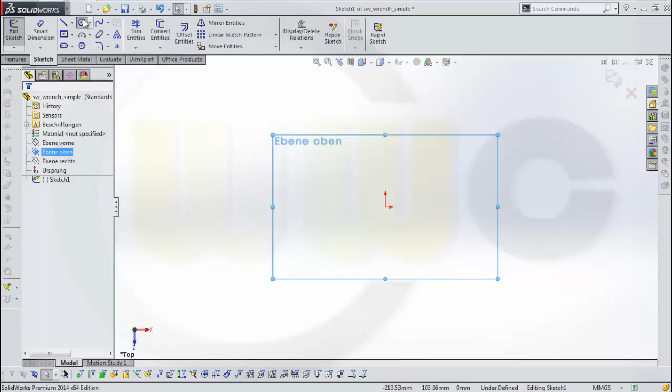Let's start with a sketch on this plane. I need a circle, and the diameter should be 35. I want to trim it. And the dimension, that's okay. And this one should be for construction only.

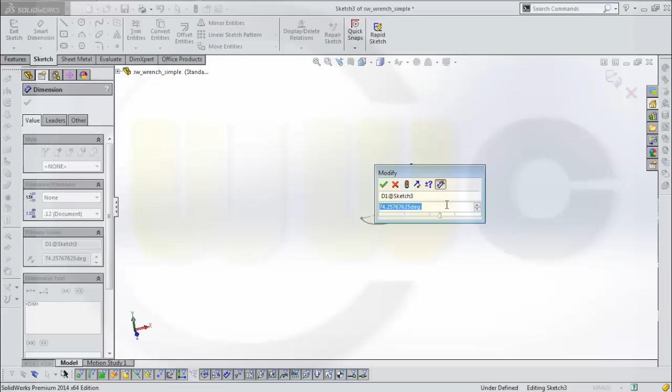Leave the sketch. Then I need another sketch, not on that plane, but on this plane. That's just a line which has an angle of 75 degrees, and the length should be, let's say, 10.

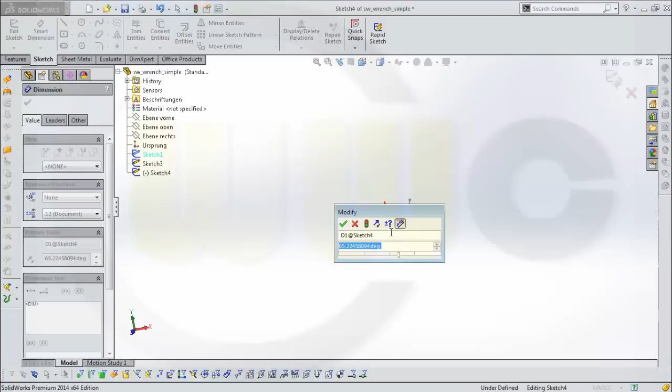Okay, and another one on the same plane, which looks like this. There should be an angle as well, 75 degrees, and the length could be 10 as well.

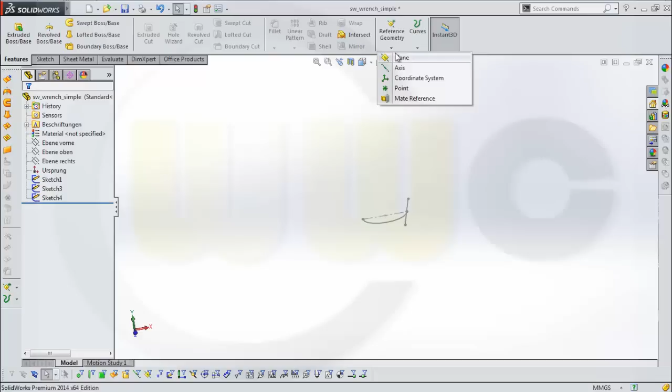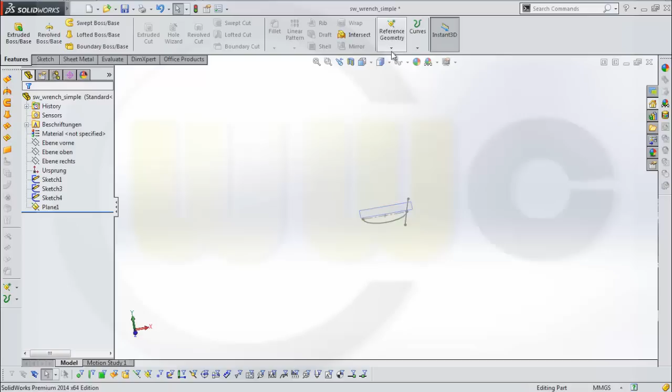Okay, then I need two planes. I need a plane with a distance to this one, yes, 7 millimeters, and another one. Flip and confirm. Okay.

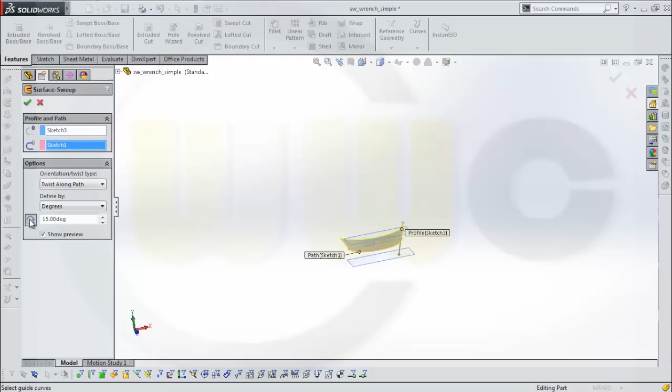Then I will go for a swept surface. The profile should be this one, the path should be this one, and it should twist along the path by, let's check it out, 15 degrees. 30. Confirm.

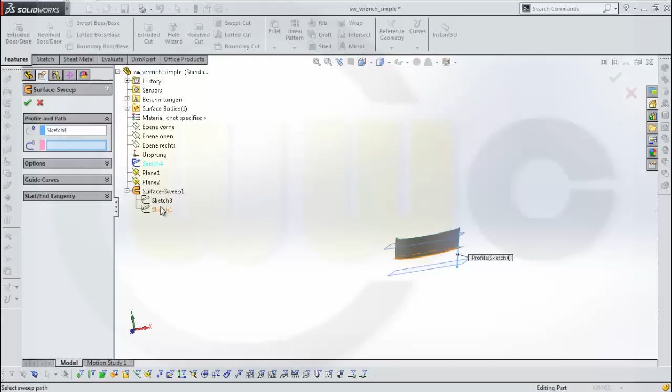And another one with this profile, and not the edge, but sketch one, and confirm it. Yep. Now I could knit these two surfaces.

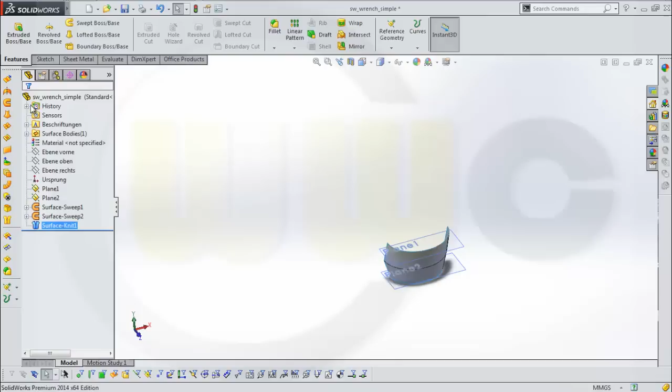Okay, and I could make a mirror with this plane, and I want to mirror the body. That's the body. Knit surfaces, merge the solids, and confirm. Nice.

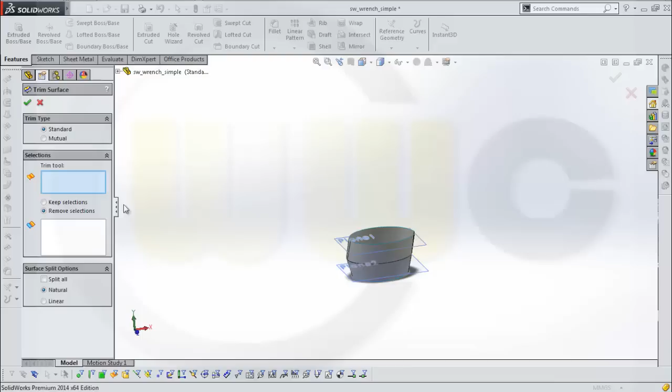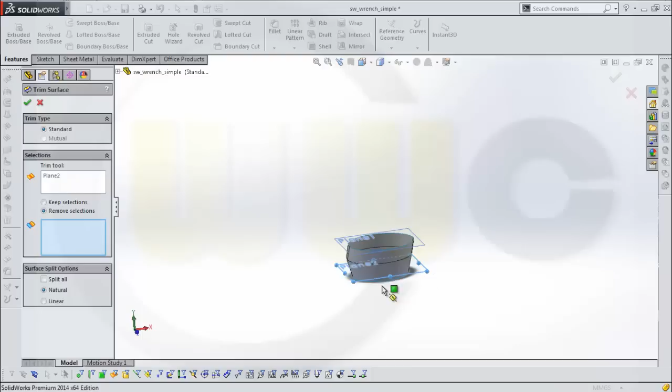Now I could trim this one. Therefore I will go to trim surface. Trim tool should be this one, and I want to remove the upper part, and confirm. And another trim. That's the tool, and I want to remove the lower part, and confirm. Nice.

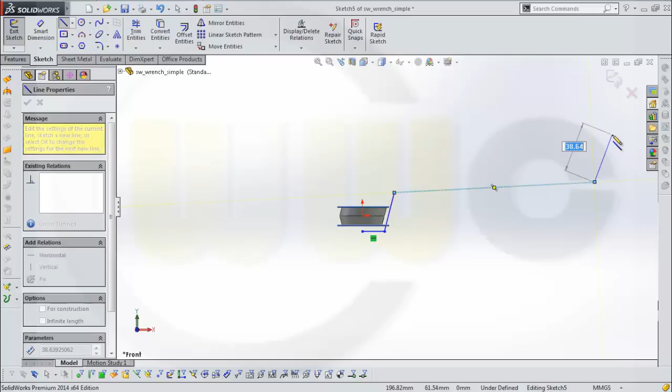Okay, I need another sketch on that plane. And this might look something like this. Yep. And some dimensions. This should be 35 divided by 2. Nope, that's wrong.

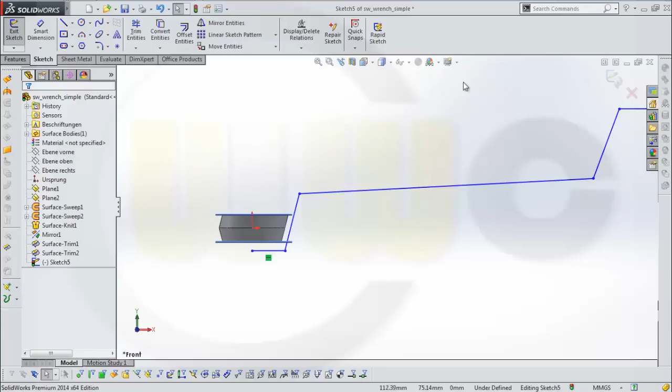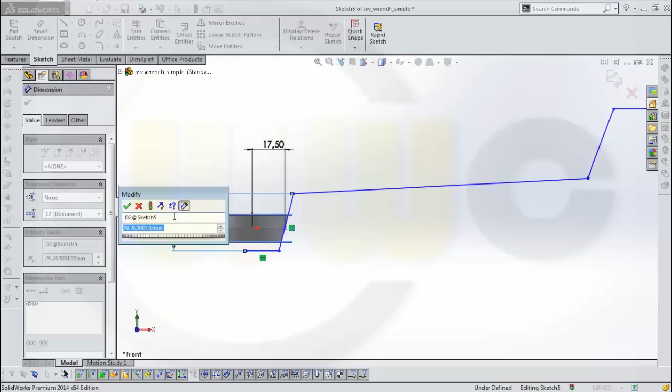There should be a point on that line, and this point should have a distance from center, 35 divided by 2. This distance should be 33.5. This should be 33.5. And the distance from here to this point should be 325 minus 7.5 minus 20.

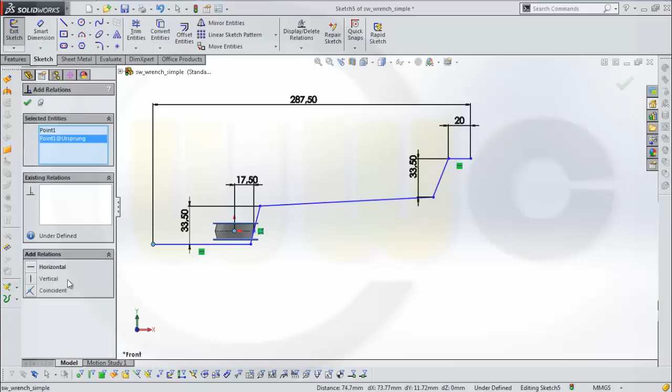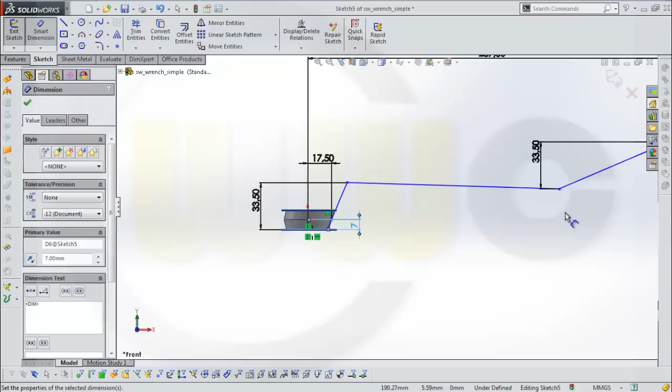Okay, this might be 20. And I need some relations. That point and that point should be aligned vertical. Yeah. And the distance should be 7. Move it up a little bit.

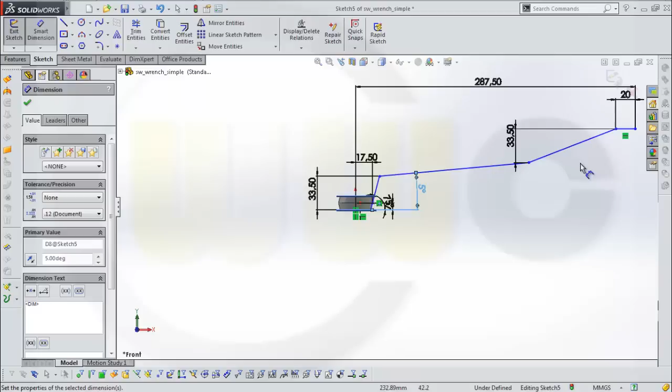Then there should be an angle of 75 degrees. This one should be 5 degrees. That one should be 75 as well. And this point should be aligned horizontal. Yeah.

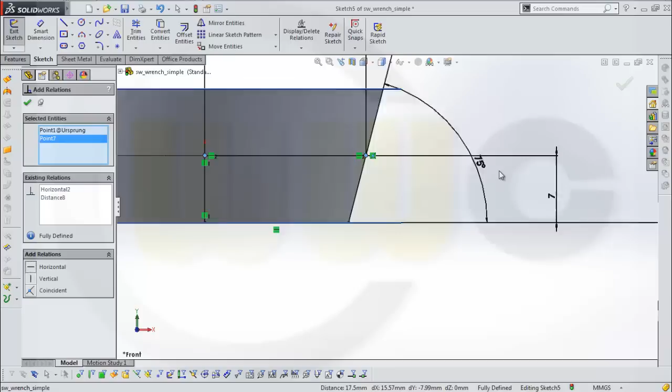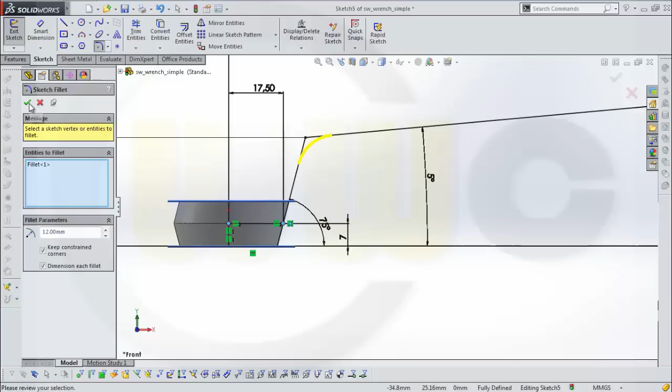Okay, and I need some fillets. This one should be 12 or 12.5. This one should be 1, and this might be, nope, 18, and the last one might be 5.

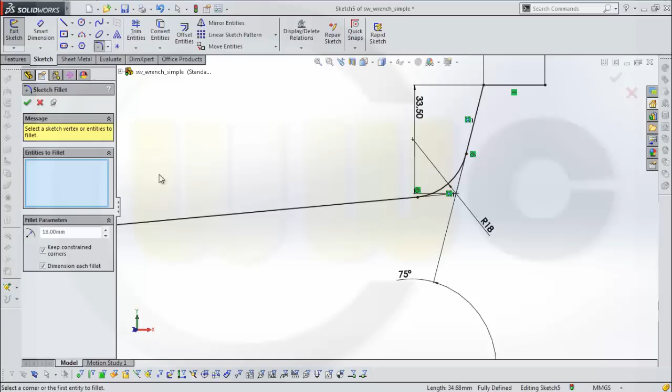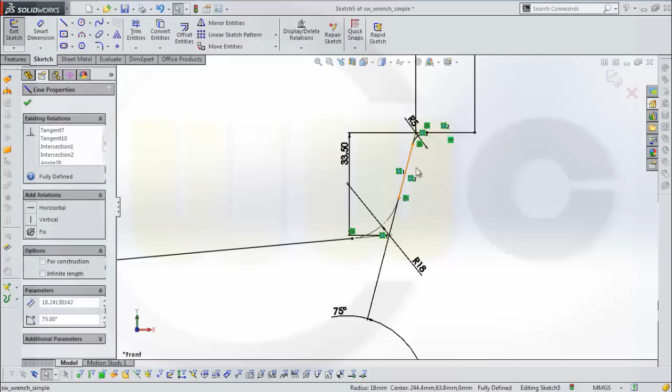And now I want, for the moment, just the line, and the other elements should be on construction, which means this one is on construction, that one, that one, that one, this one, this one, that one, and that one as well. Leave the sketch.

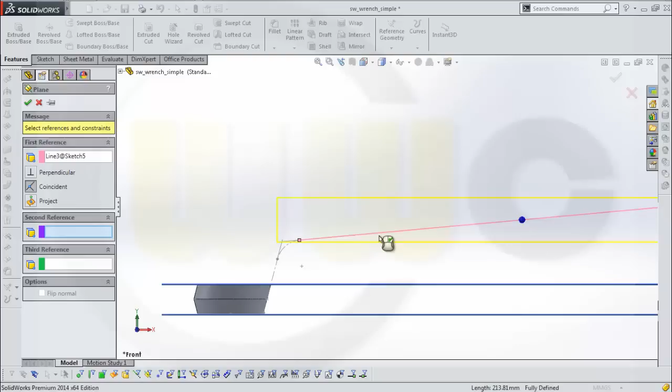Then I might need another plane, so go for plane, and one reference should be this, and the second that point. So I got a plane which is perpendicular to that curve, and finish it.

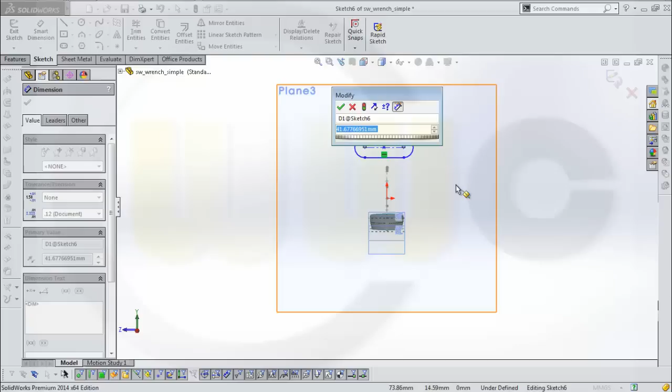Okay, then I need a sketch on that plane, so go to this plane, sketch, take a normal view, and this might be an elongated hole. Give it dimensions. This should be 8, and this should be 4.5.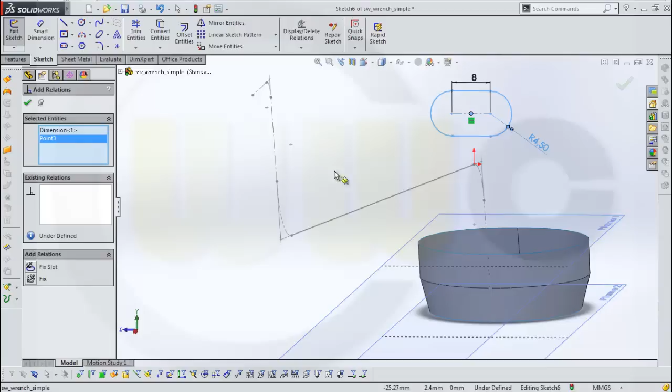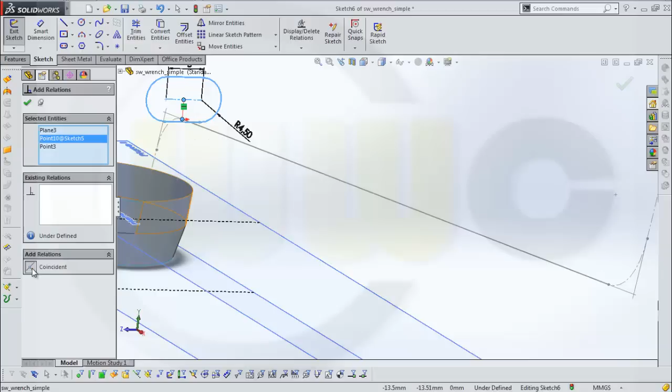And add a relation. This point should be right on that point, coincident. So I missed the correct one. I need, of course, this point. Add a relation between that point and make it coincident. Okay, now leave the sketch, and now I can make an extrude with that sketch up to an element, up to a vertex, up to this vertex, and confirm it. Yeah.

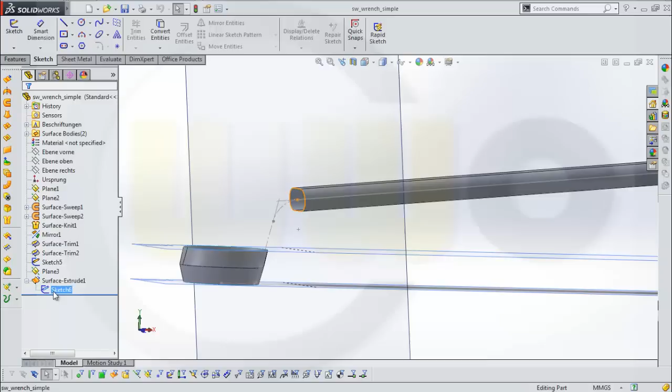Okay, I just noticed a small error. This should be in a different position, so I go for my surface extrude, and I will change the sketch because this is wrong. There should be a distance, and this should be 4.5.

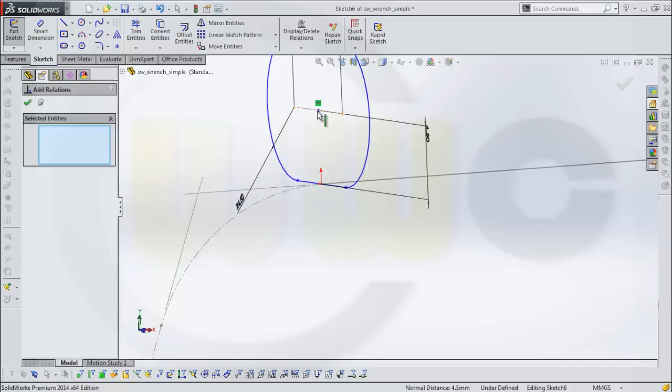And I need a relation, this point and that point, no, this, come on, this point and that point should be vertically aligned. Yeah. Then I need some more curves.

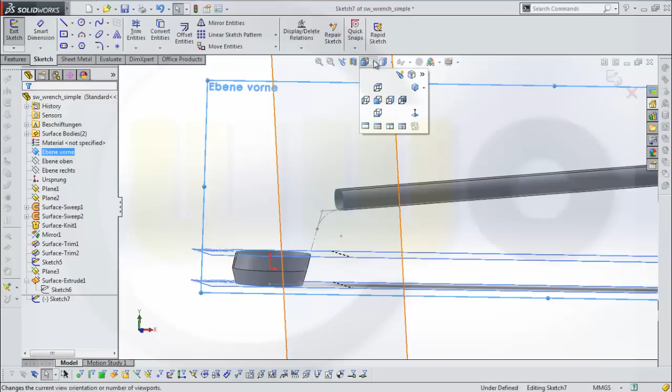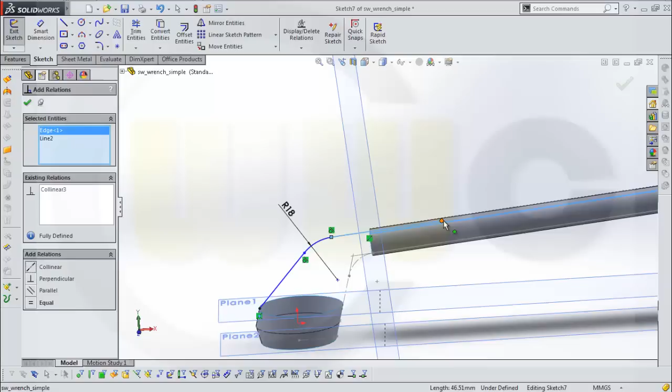First, one sketch here. Take a normal view. This should look like this. Give it a fillet with 18 millimeters. And add a relation. This point should be right on that point, coincident. This line should be in the surface, collinear. That point should be in that plane, coincident. And I need a dimension between this line and probably that plane, 75. Confirm and go.

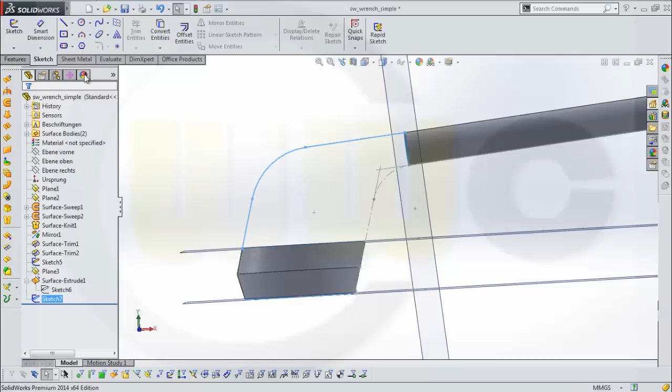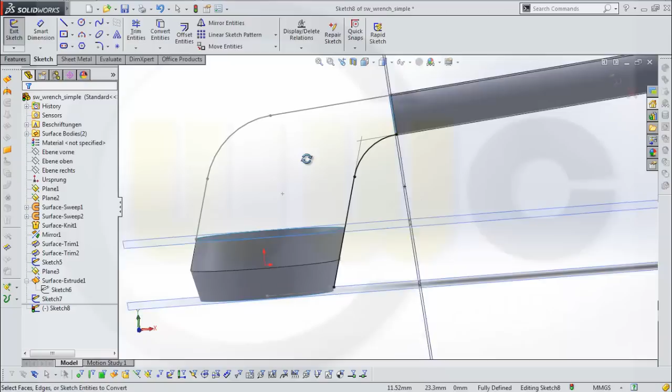Now I need a small part of that curve, so I could do with another sketch. That's this plane again, and I want to convert this and that. Yep, but I want to trim it, so I need a point. This point should be coincident in that plane, and then I should probably trim it and draw a line here.

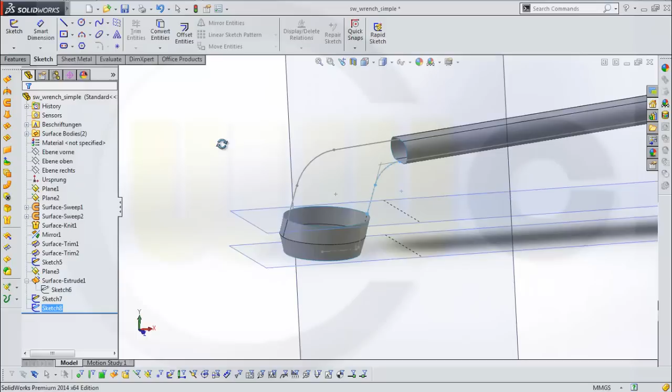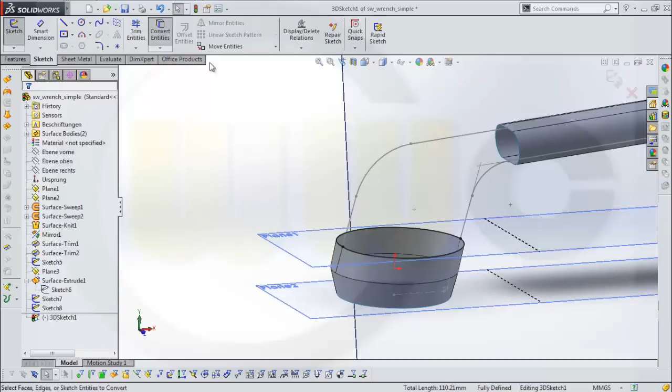And maybe add a relation that should be tangent. Yeah. Okay. Now I could try to do a loft. I want to have a loft. No, I forgot something. I need a 3D sketch. And I want to convert this and that. And I want to convert these edges as well.

And okay, now I could try to do a loft. I want to have this and that profile. I want to have tangency to the first face and tangency to the second face.

Maybe move it a little bit. Nope.

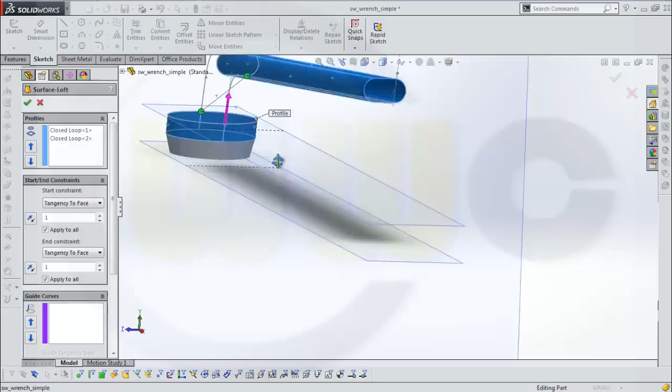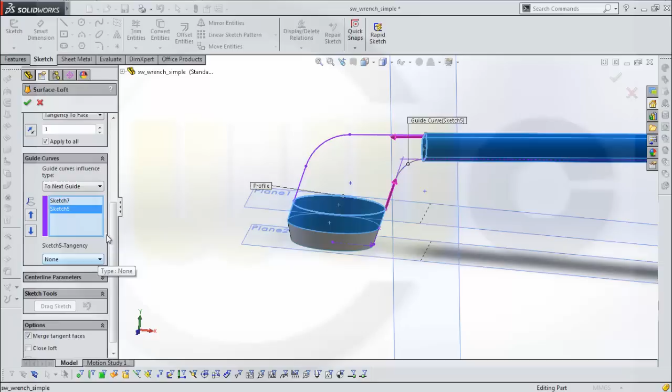Okay, and I want to have some guide curves. That's one guide curve, and I want to have a second guide curve, this one. And that's not sketch 5, but sketch 7. Looks nice, very, very nice.

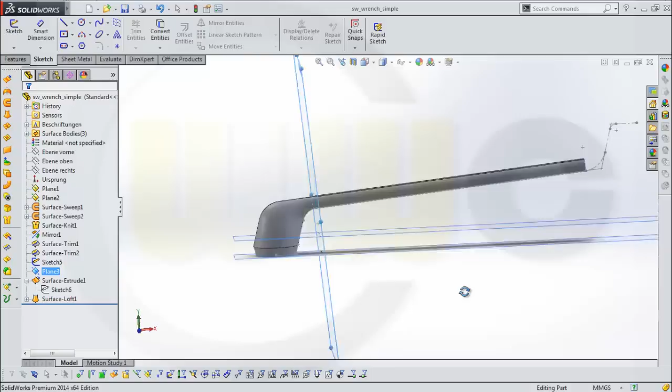So I need 2 more sketches at least. Let's take a look again on this plane. And this might look, it could be something like this. Goes up.

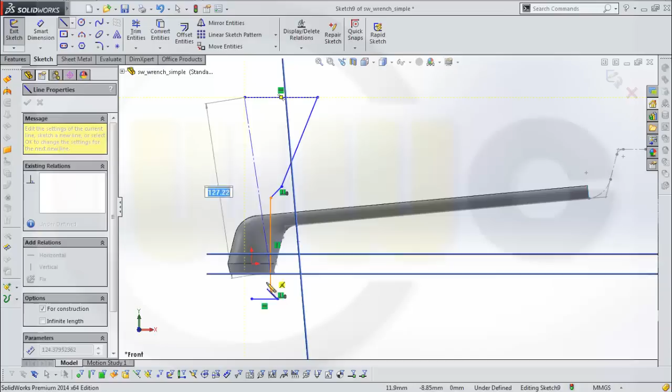This could be a center line, of course, so let's make it a center line. And then add some dimensions. This should be 30 degrees.

This should be 30 degrees. This should be 80 degrees. This point and that point should be vertical aligned. Yep.

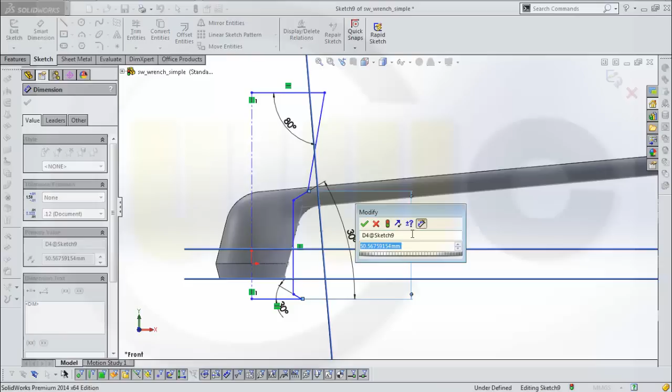Then some more dimensions. This should be... first I want to add some more relations. Vertical aligned, and then I could change this one to 14.

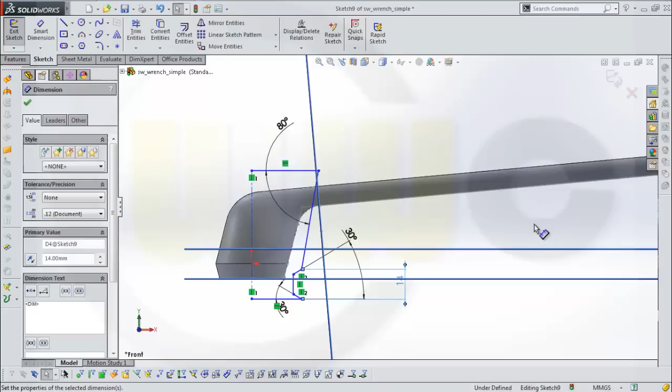And this should be 18.76 divided by 2, and this should be 5.3 divided by 2. Yeah.

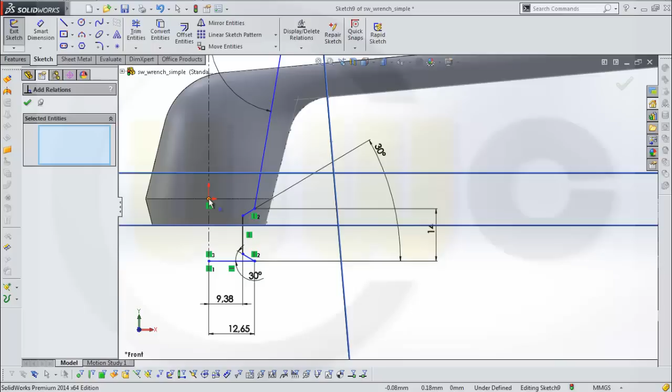And some more relations. This point and that point should be vertical aligned, and this point and that point should be... there should be distance from this point to that line, and this should be 7.

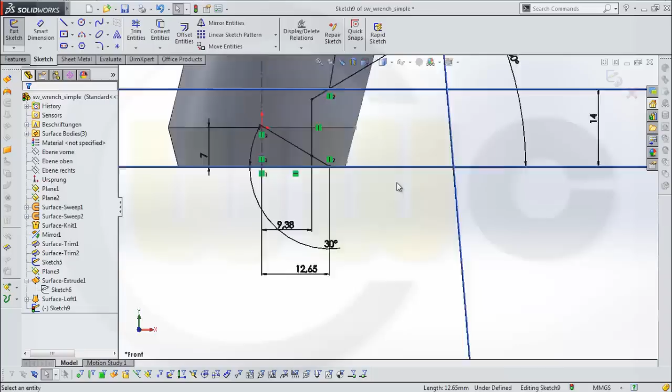Okay, this might be for construction, and this might be for construction. And close. This should be a revolved surface. This should be the complete sketch.

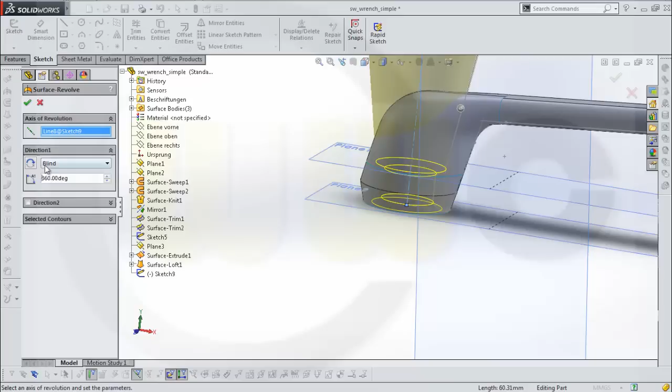And that's the axis. It should be 360 degrees. Yeah.

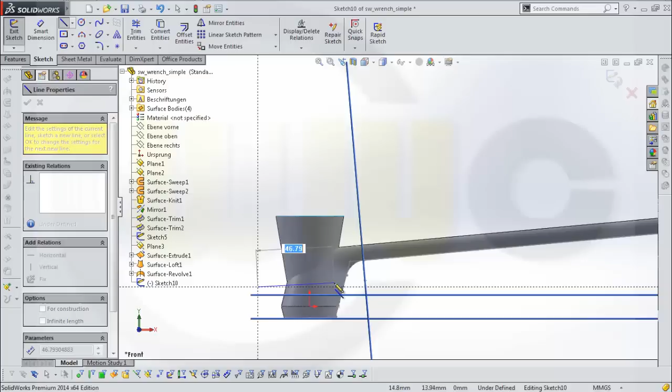Okay, another sketch. Take a normal view, and this should look like this. One fillet here, which is 5 millimeters, and another one which should be 18 right here.

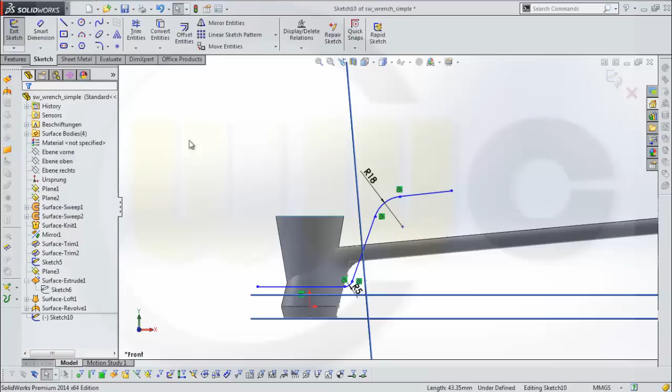Okay, so this line should be coincident to that plane, and this one should be collinear to this one.

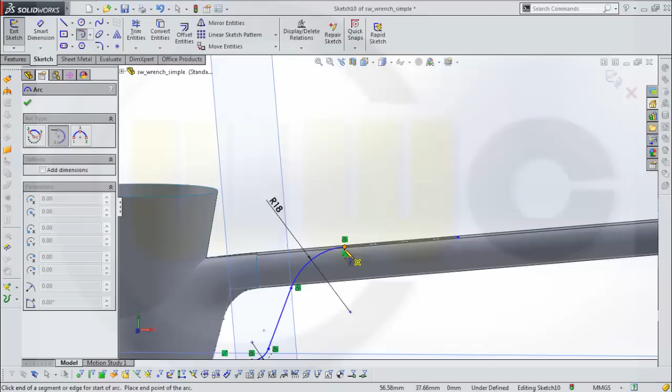And make this line for construction, and I need some sort of arc like this maybe. Okay.

Now I could move this a little bit. Maybe like this. Okay.

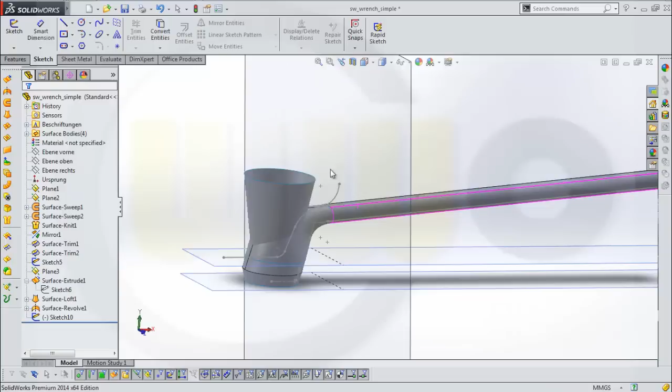And now I want to make an extrude with that sketch. Make it mid-plane. Make it, for example, 60, and confirm it.

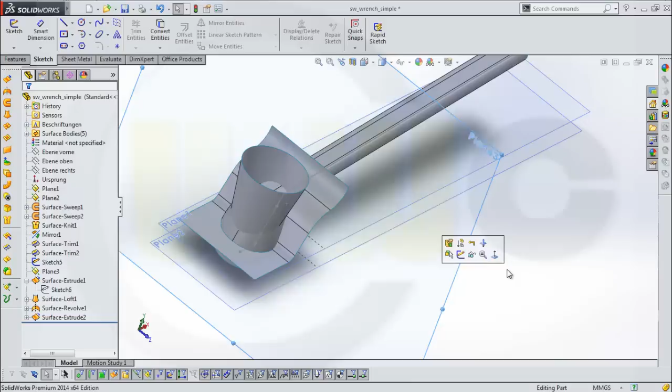Now, what else do I need? I need some trims. First, let's knit the surfaces which belong together. So this one, that one, and that one.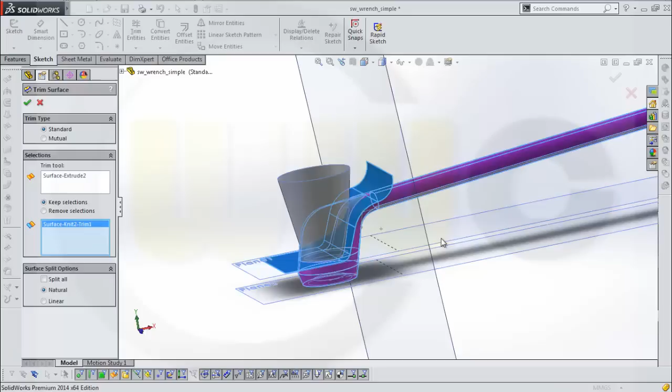And now I could try to trim where you are, and I want to use that trim tool, and I want to keep this, and I want to keep this one. Yep.

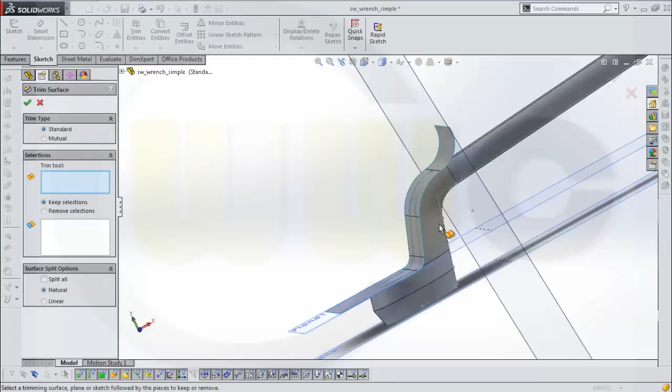And another trim. This. And I want to remove this part and confirm it. Yeah. And again another trim.

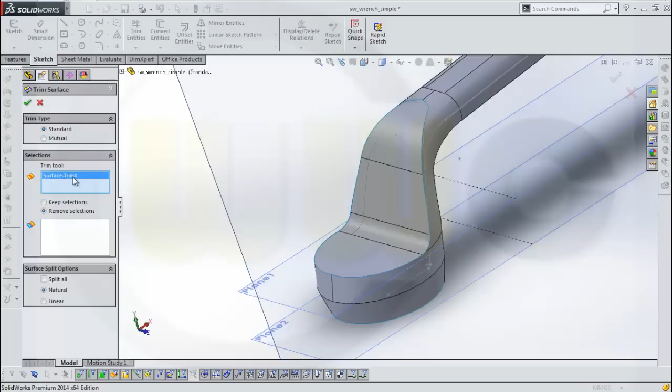Now I want to use this as trim tool, and I want to remove this. Yeah, that's it.

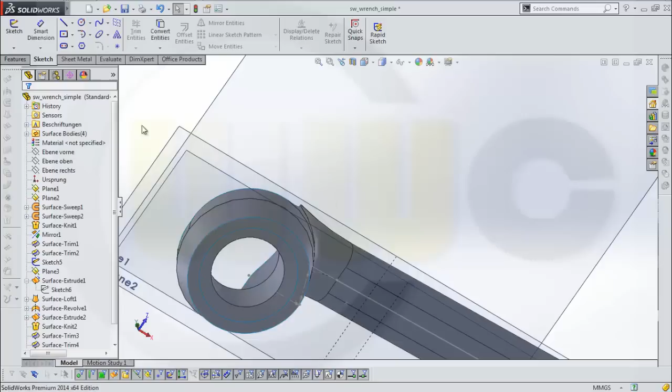Now I could knit the rest. No, I need something over here. I want to have some planar surface. Let's try. That's one, and that's the other one. Confirm. Yeah, there you go.

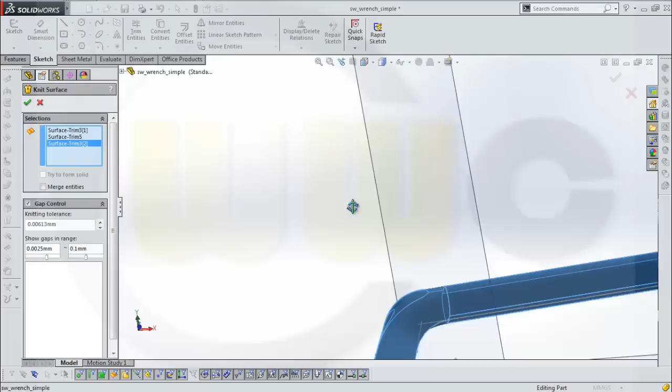And now I could join them. So that's 1, 2, 3, and 4. And still one is missing because at the end, so I might close this one as well.

And now if I make a knit, it should be possible to make it a solid. So let's go for knit.

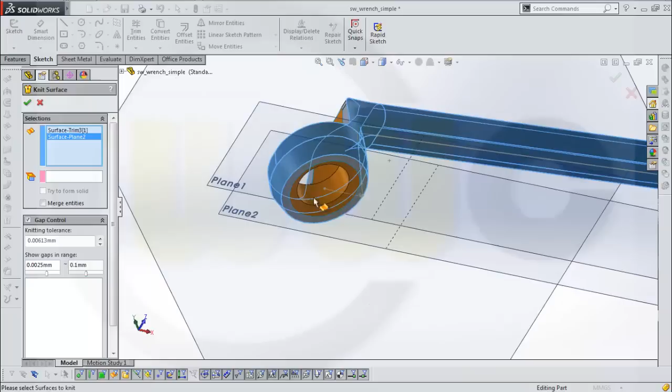I want this one, this face, that surface, and that surface. Merge entities, try to form solid, and confirm.

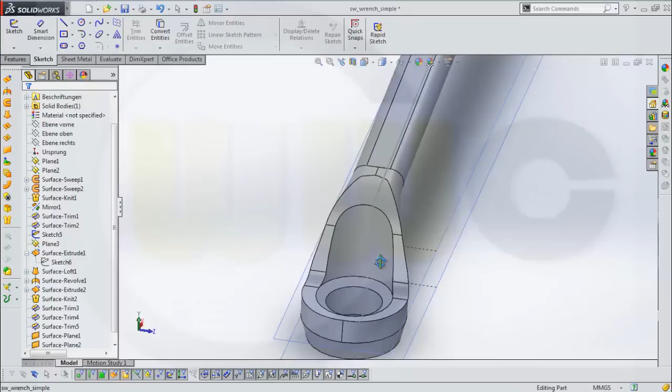Now I got a solid, and I could do some fillets here. So maybe a fillet with 1 millimeter. Not 10. Just 1.

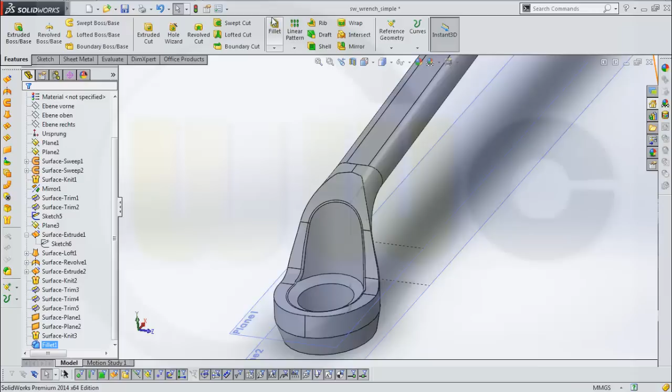And maybe another one on these as well with 1 millimeter. Okay, now you would have to do the same things on this side with different dimensions, and just to speed it up a little bit, I will make a pattern as I did before in CATIA, so it's the same dimension here and there.

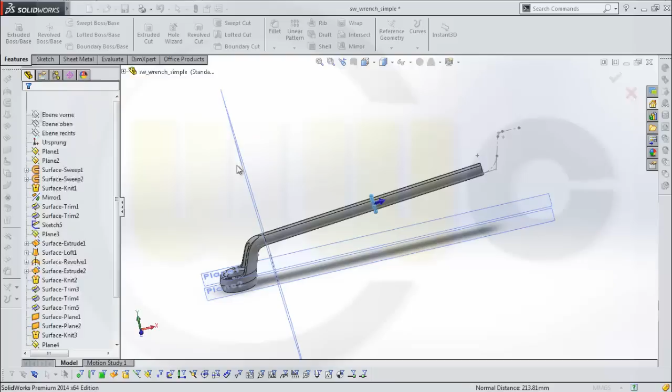So let's go for plane. I want to have a plane between this one and that face. That's the mid plane, that's okay. And then I want to make a sketch on this plane.

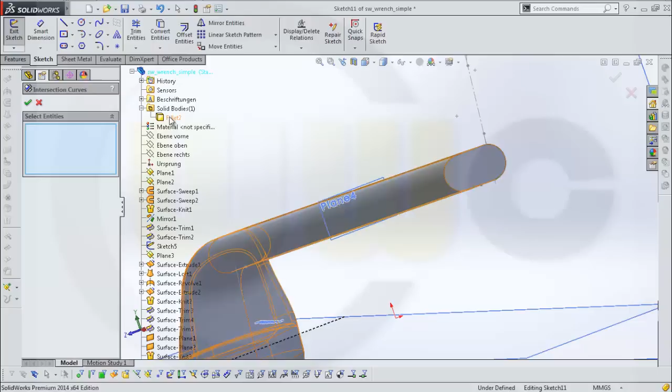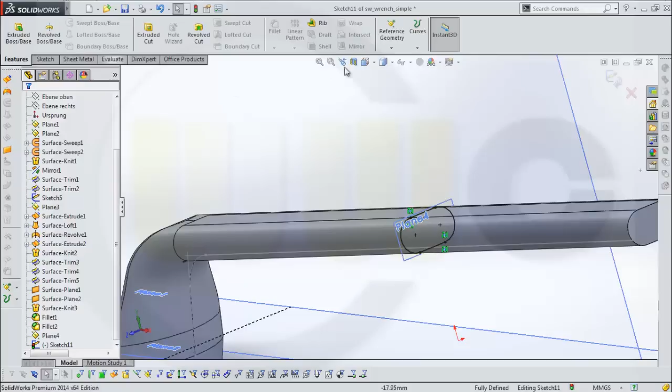And I want to intersect with the body, so I get all these elements, and I just need an axis through these points. So I go for an axis. Maybe I should leave the sketch, and I want to have an axis which goes through these 2 points.

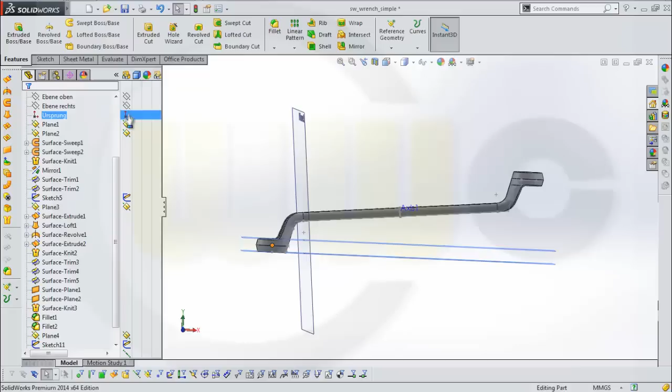And now I could make a circular pattern, and that's the axis, and I want equal spacing, 180 degrees, and I want to pattern the whole body, and confirm it, and I'm done. Just hide these.